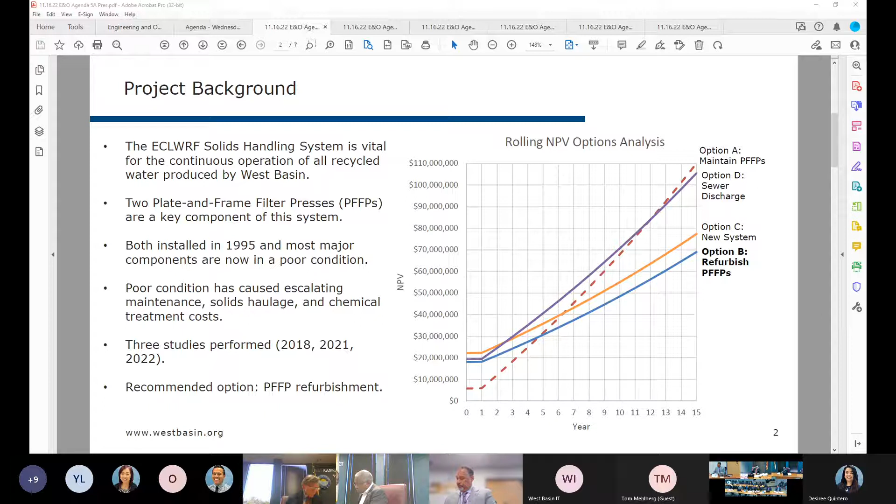Before we get to the action item before you today, I'd like to just take a moment to address some comments raised in the previous presentation. So 3 requests were made. The first was a request for further detail on the current actual costs of running the solids handling system. The second request was for additional background on how the costs were estimated for option A, maintenance of the PFFPs, also known as the do nothing option. And the third request was for further information on how our maintenance contract functions.

Regarding this first request, this slide here shows a chart of the actual costs of operating the solids handling system since 2013. The table to the right details costs over the last 3 financial years, rounded to the nearest $100,000. As you can see, we have experienced steep climbs in nearly all cost categories across the last few years. And as stated in my prior presentation, this is mainly due to the poor condition of the system, leading to increased maintenance, operator presence, and haulage.

Over the last couple of years, the solids handling system has cost approximately $5 million to operate and maintain. And as stated in the previous presentation, our calculations show that refurbishment of the plate and frame filter presses can significantly reduce this to around $2.8 million per year, generating a break-even period of approximately 7 years, despite the $15.3 million capital investment required for the refurbishment. Next slide, please.

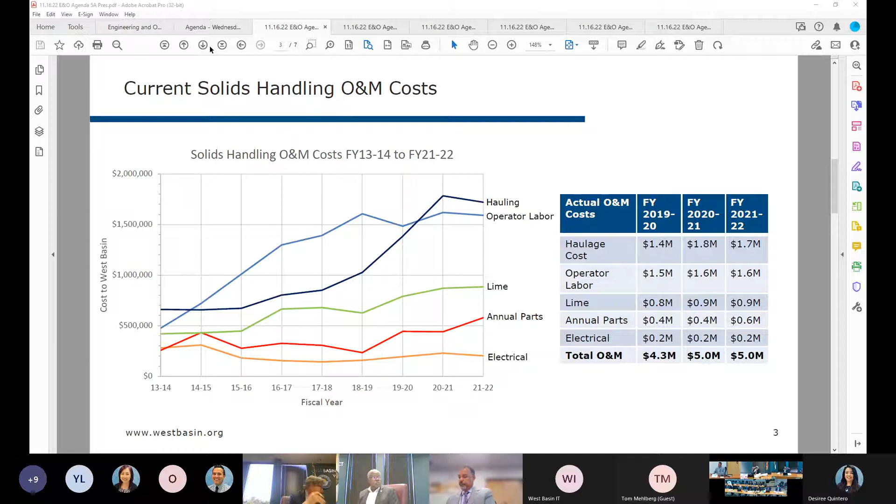The second request from the last E&O was for a more detailed breakdown of these do-nothing cost estimations, the option A cost estimations. So here I've taken the same table from the previous slide and added in a column with the cost estimations used on that option. As you can see in the table, the estimated costs closely track the costs from previous years, with 3 notable exceptions: operator labour, annual parts, and quantified risks.

Operator labour was estimated to be slightly lower than actual cost from previous years. This is due to the fact that the actual costs shown here in the last 3 fiscal years include a small amount of labour on other elements of the solids handling system, so the gravity belt thickeners and sludge conditioning tanks. As for the purposes of this, we're only discussing the plate and frame filter presses. The estimated labour cost was estimated to be slightly lower.

The second and third deviations, so that's the annual parts and quantified risks, are linked. If you remember from the previous presentation, quantified risks include estimated costs for replacing components, plates, and associated downtime. Therefore, the annual parts estimate needs to be reduced as some of these costs are covered in the quantified risk category.

Overall, we estimated the annual O&M cost of the do-nothing period to be $5.8 million moving forwards. As you can see, this is a close approximation to the actual cost last year of $5 million. The slight difference here can be explained with the quantification of risks, such as component failure and downtimes that we expect to occur more frequently as we continue to operate a system that is in a poor condition.

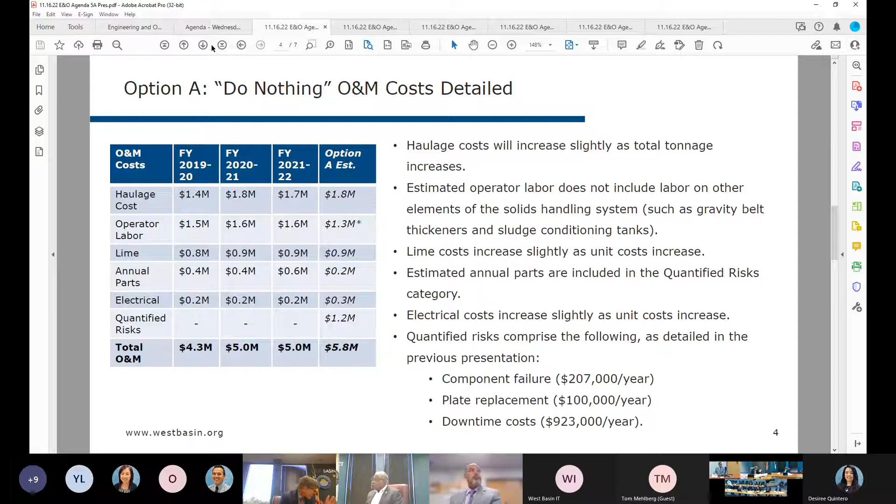I was going to pause here for any questions, but I know we've got a full agenda, so if it's okay, I'll continue on for the rest of the presentation. Take questions at the end. For right now, go ahead, unless Director Williams. Okay, excellent. So next slide, please.

So moving on to the action item. This slide depicts the overall project schedule. Last month we presented the project review, and today we're bringing the filter cloth procurement award forward for you. So the project review is in the top left there, and the filter cloth procurement award is in the red box. This is the first board action on this project, and it consists of the procurement of replacement filter cloths for the PFFPs. The actual procurement cost is $68,180. However, we have included a 10% shipping contingency of $6,818 to ensure we can manage any potential shipping cost changes.

If this procurement is approved, the next item before the board will be the procurement of a contractor to install these cloths. Staff aims to bring this contract award for this work before the board in January of next year. That award is estimated to be approximately $75,000. Next slide, please.

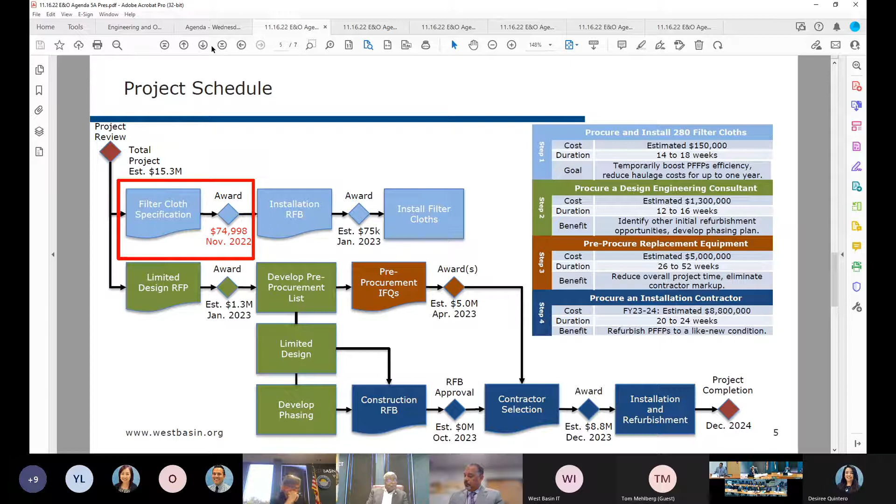So on to the business case as to why staff recommends actually replacing these filter cloths. In the last financial year, we spent $1,719,826 on hauling away these solids cakes produced by our PFFPs, our plate and frame filter presses. Now, this was on the previous contract where we were paying $66 per tonne. We're now moving on to a new contract that will be $87 per tonne. This contract was approved by the board back in May of this year.

In July of this year, as part of the planning for the solids handling improvements projects, we conducted an inspection of the plate and frame filter presses alongside a representative of the original equipment manufacturer, so the manufacturer who made the presses back in 1995. As part of this inspection, the representative identified that not only were 2/3 of the filter cloths fitted to the presses in a poor condition, but that we were utilising filter cloths of inferior quality.

According to this representative, such inferior quality cloths have flooded the US market in recent years, and many previously reputable vendors were switching to these cheaper cloths despite promising higher quality versions. This information about poor business practices within the industry was later corroborated by another public agency that has the same filter cloth requirements as West Basin.

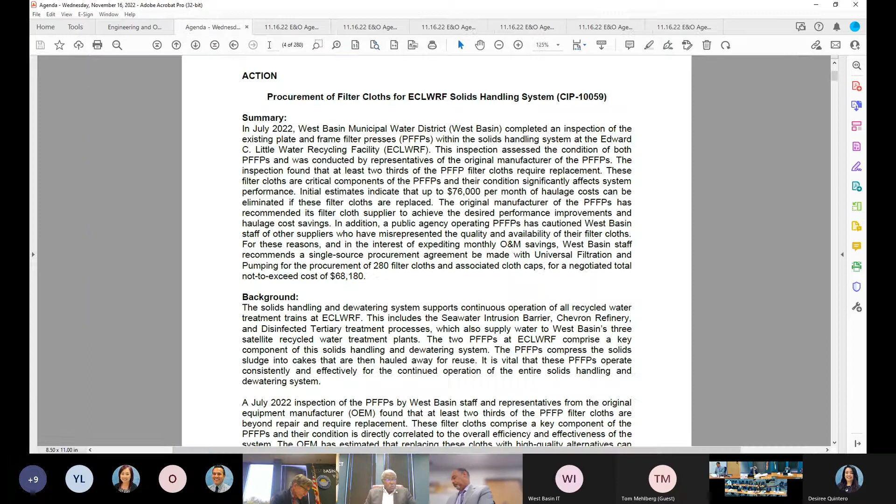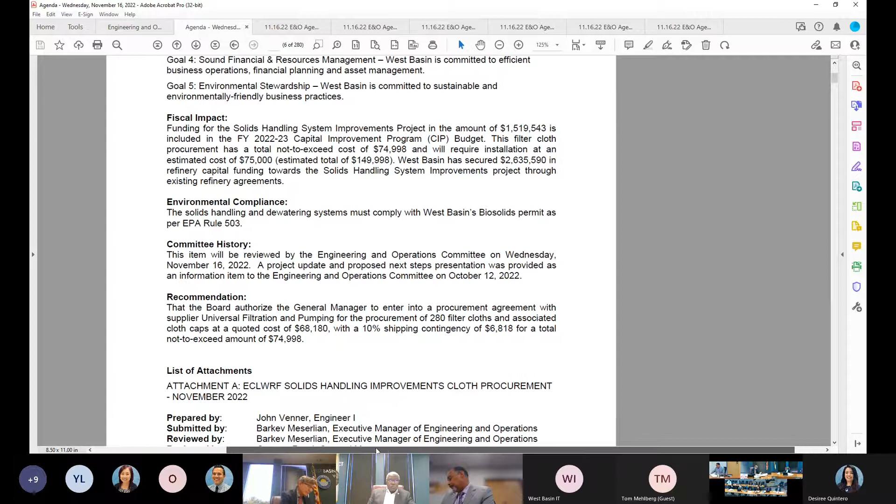So with that, I'll ask you to return to page 6 of your board packet for the recommendation: that the board authorize the general manager to enter into a procurement agreement with supplier Universal Filtration and Pumping for the procurement of 280 filter cloths and associated cloth caps at a quoted cost of $68,180 with a 10% shipping contingency of $6,818 for a total not to exceed amount of $74,998. And with that, I welcome any questions.

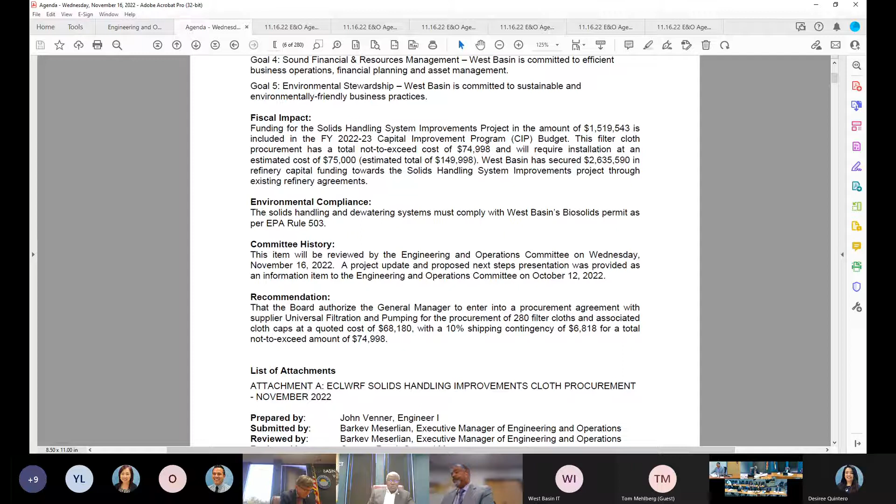All right, John, thank you very much. Director Williams, do you have any questions? I have no questions other than to the general manager. Is this a good deal for us? I think it's a very good deal. The cost savings that's demonstrated by the analysis, the efficiency of producing a drier solids cake from our solids handling process will help us realize that savings. It's a first step out of many steps.

And what John didn't talk about is having a better solids handling process will help the overall handling of solids throughout our recycled water production process and improve water quality. It'll be one of the contributors towards improved water quality for our Title 22 process. Okay, thank you.

Okay, I do have a couple of questions. Back to your cost/savings analysis. Basically, on this particular item, by replacing the filters, we're obviously going to reduce the amount of hauling that needs to be done. So the estimate is about $900,000. Is that consistent if you project this over the next 5 years? And the follow-up question to that is, what is the life of the next replacement cycle for these filters?

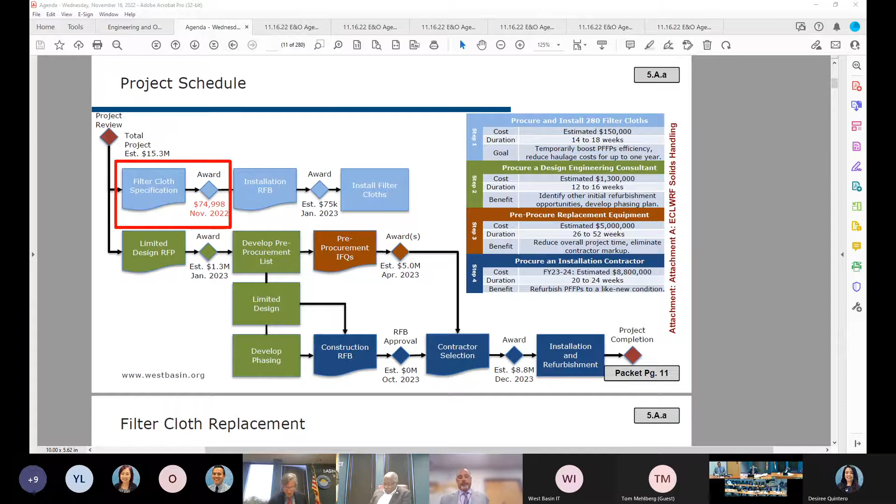We have the agreement amendments for supply and delivery of carbon dioxide and sulfuric acid. And general manager, if you want to handle that one? Yes, and so we have Susanna Lee here, our senior operations engineer. And if it would please the committee, we can have her speak to both item B and item C, both dealing with chemical contracts, so we could flow right from one to the other. Is that okay? Yeah. Okay, fantastic. So Susanna, please. Thank you, Greg, and good afternoon, Chairman Alvarez and William.

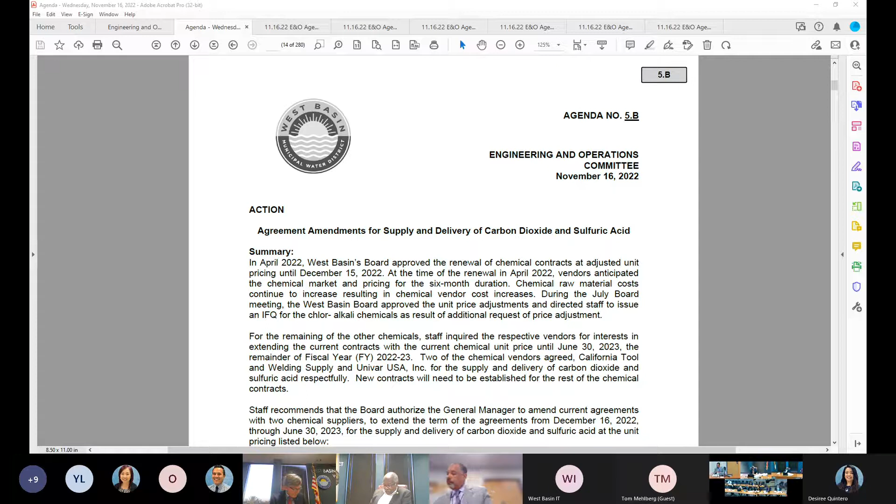So as Greg mentioned, we have two agenda items, items 5B and C, related to chemical contracts. As we are all aware, the chemical industry has been facing a lot of struggles with supply chain issues, and with the latest, the railroad strike that will potentially go on in early December. And so what I'm here to present in these two items is to establish contracts for the remaining bulk chemicals for the rest of the fiscal year 22-23.

The last time staff came to present to the board in regard to chemical contracts was in September for the chlor-alkali chemicals contracts, in which the board directed staff to establish new contracts as we were continuously facing requests from vendors for price adjustment. And so those three contracts will end March 31st, 2023. So before the end of the fiscal year, I will be coming back to request either an extension for those three bids or going out for bids for those three chemicals again.

So for the remaining 8 bulk chemicals that we had renewed back in April, the contracts are ending December 15, which is coming up in a month. So those chemicals need new contracts. And before staff actually went out to advertise new IFQs for those chemical contracts, staff extended invitations to chemical vendors on whether they have interest in extending the contracts with the current unit pricing until the end of fiscal year 2022-23.

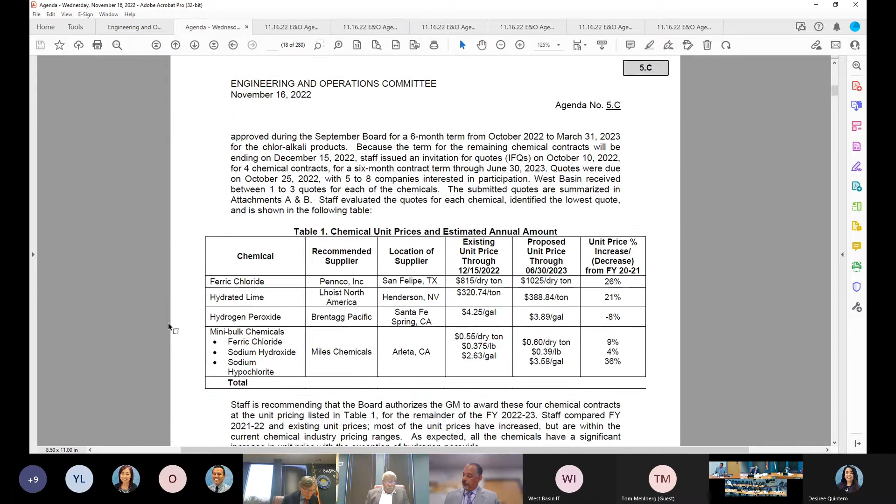So staff evaluated the quotes for each of those chemicals and identified the lowest quotes as shown in table 1 of the memo. So as shown in the table, and as expected, there is a significant increase in unit prices for those chemicals ranging from 4 to 36%. The 36% increase being sodium hypochlorite is one of the chlor-alkali, but that's for the mini bulk contracts.

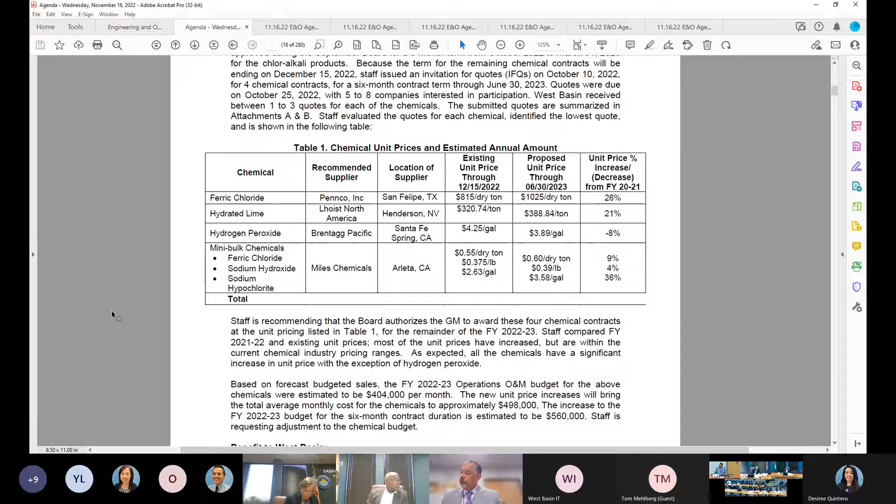There is one exception with hydrogen peroxide having a reduction in unit price. And the explanation is that Brenntag is actually the manufacturer for that chemical. The current contract that we have for that chemical is Miles Chemical. They actually purchase the chemical from Brenntag currently. Miles Chemical actually notified staff that they will not be able to hold the pricing for 6 months, but only for 3 months. So hydrogen peroxide is the only chemical that has a reduction, 8% reduction in unit pricing compared to the current contracts.

So based on the forecast budgeted sales for fiscal year 22-23, the O&M budget for these chemicals, we estimated about $404,000 per month. And with the new unit price increase, this will bring the total average monthly cost for these four chemicals to approximately $498,000 per month. And the increase for fiscal year 22-23 for the 6-month contract is estimated about $560,000, based on the current budgeted sales. So with that, I will be reading the recommendation for both memos at this point, and I'll take questions afterwards.

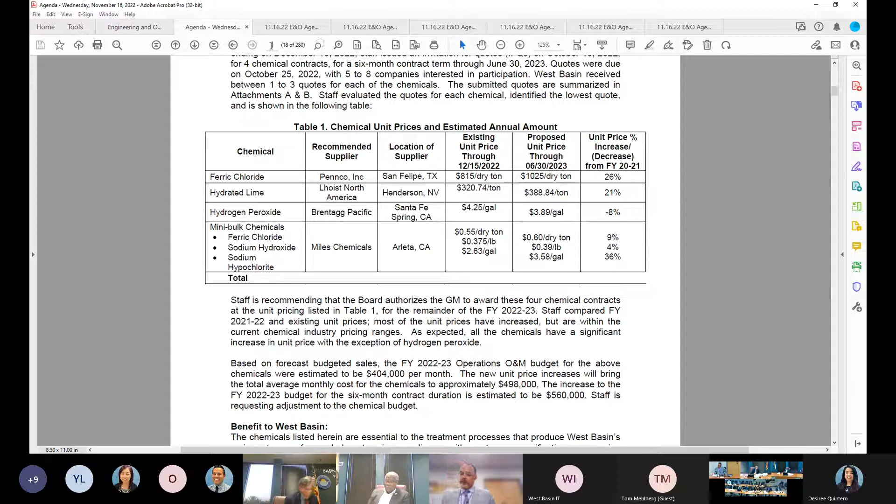So for item 5B, the recommendation is that the board authorize the general manager to amend current agreements with 2 chemical suppliers to extend the term of the agreements from December 16, 2022 through June 30th, 2023 for the supply and delivery of carbon dioxide and sulfuric acid at the unit pricing listed below. Carbon dioxide, California Tool and Welding Supply to supply and deliver carbon dioxide at 0.085 per pound, plus 0.0475 per pound of surcharge fee. For sulfuric acid, Univar USA Inc. to supply and deliver sulfuric acid at $365 per ton for ECL, $450 per ton for Torrance and $365 per ton for JMM.

And the recommendation for item 5C, that the board authorize the general manager to award agreements with the following chemical suppliers for the second 6 months of fiscal year 2022-23 from December 16, 2022 through June 30th, 2023 for the supply and delivery of the following chemicals. Ferric chloride, Pennco Inc. to supply and deliver ferric chloride at $1,025 per dry ton. Hydrated lime, Lhoist North America to supply and deliver hydrated lime at $388.84 per ton. Hydrogen peroxide, Brenntag Pacific Inc. to supply and deliver hydrogen peroxide at $3.89 per gallon.

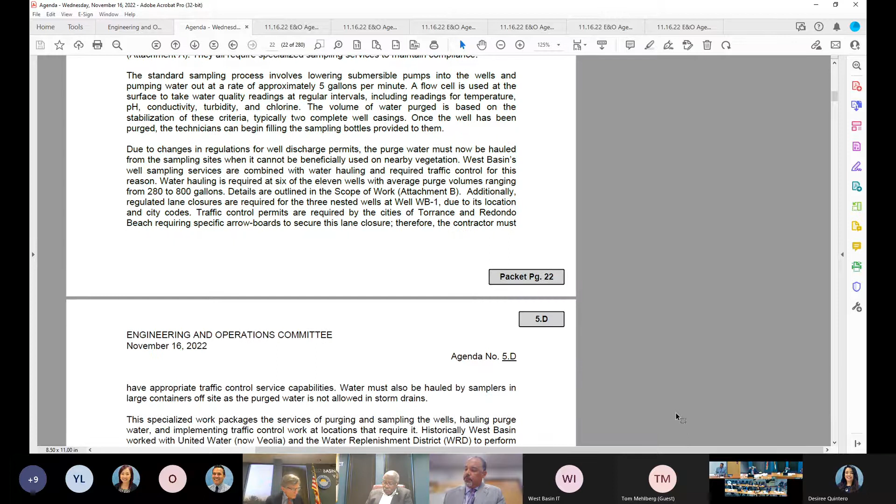Because there have been changes to the regulations for well discharges, West Basin now has to either haul away the purge water or use it on nearby vegetation. And the final component of this bundled project is traffic control. The triple nested well, which is the only one that's actually owned by West Basin, is on a busy street that requires a lane closure and the associated permits, equipment, and city notifications. Since the city's well discharge permit was amended in 2018, West Basin worked to find full-service sampling firms who could haul away the purge water and comply with the strict traffic control requirements.

3 people evaluated these proposals, including an outside evaluator from LA County Department of Public Works, who is our partner in the barrier project and owner of 8 of the 11 monitoring wells. A summary of the evaluation scores is provided in attachment C. A cost summary and copies of both of the companies' pricing is provided in attachment D. Both of the companies are capable of performing the full scope of work.

After evaluating the 2 proposals for the project and considering the recent staffing and trucking shortages, staff is recommending to split the contract in order to maintain flexibility with the sampling requirements. The overall score for the WPI proposal reflects careful attention to detail and a deep understanding of the full scope of the project. Blaine's score also reflects competence and allows for issuance to sample for 3 of the monitoring wells.

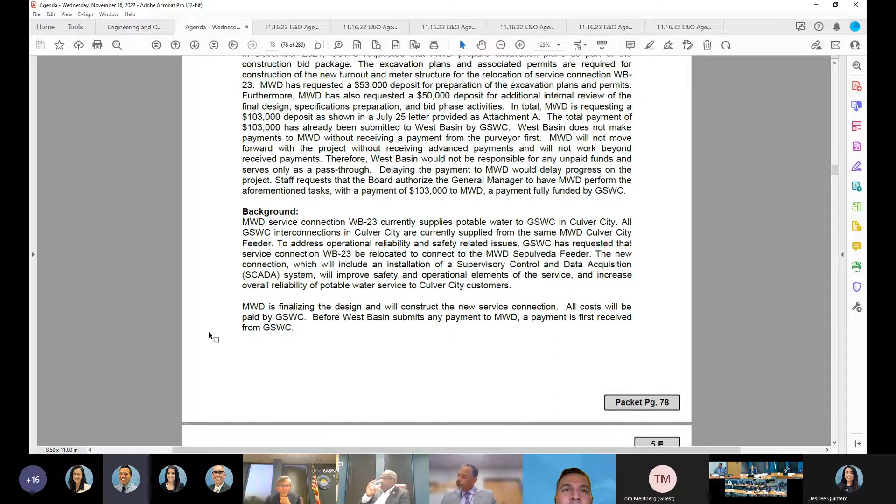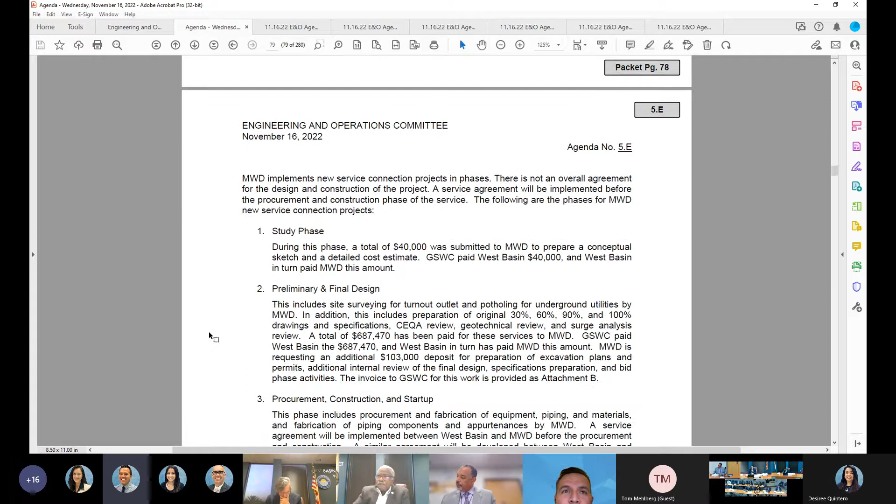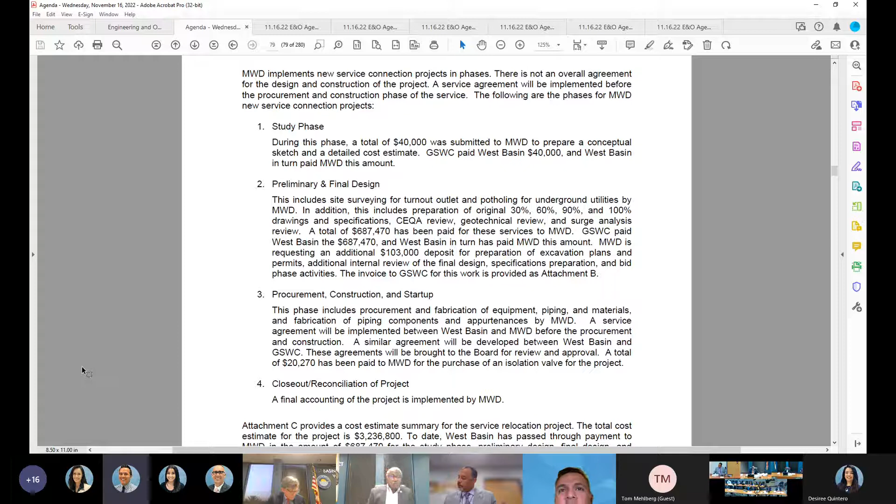MWD is currently in the final design phase of the project itself. Recently, in December of 2021, Golden State requested that MWD prepare excavation plans as part of the construction bid package. Additionally, MWD has requested a deposit for additional internal review of the final design, specifications preparation, and bid phase activities. As a result, MWD is requesting an additional $103,000 deposit for these tasks. West Basin has received the funds for this additional deposit from Golden State, and therefore is ready to issue payment

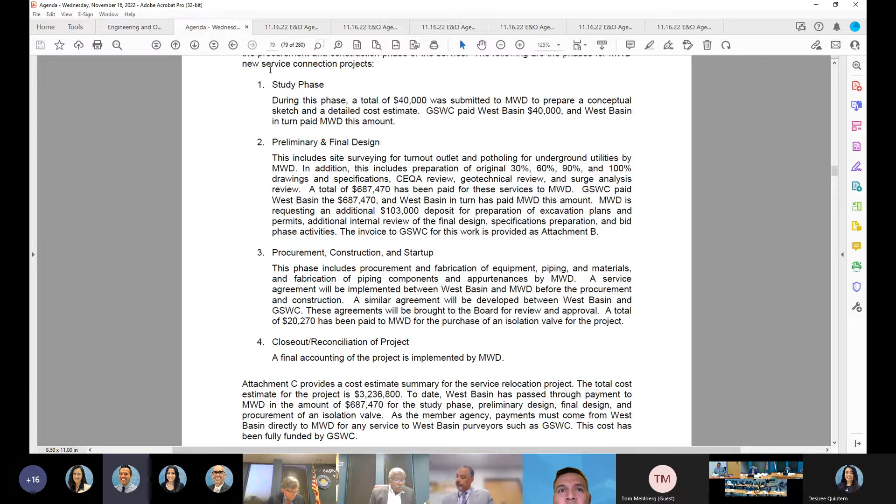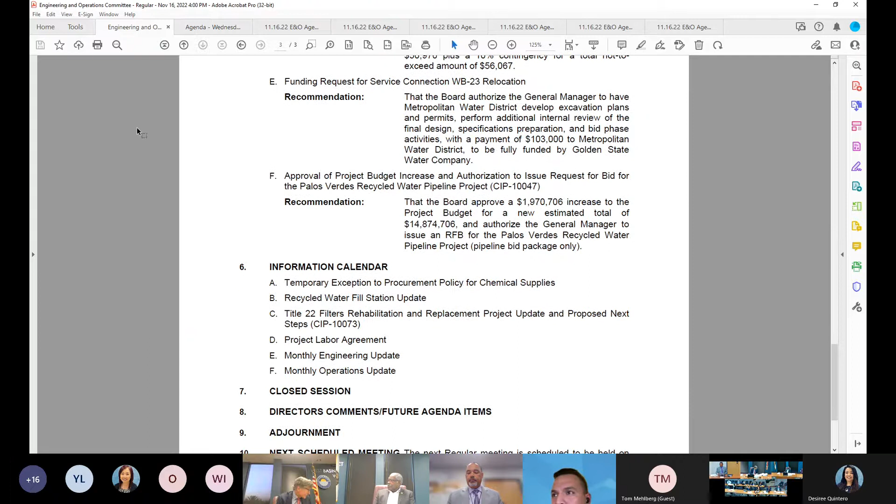to MWD. So at this time, I would like to read the recommendation that the board authorize the general manager to have Metropolitan Water District develop excavation plans and permits, perform additional internal review of the final design, specifications preparation, and bid phase activities with a payment of $103,000 to Metropolitan Water District to be fully funded by Golden State Water Company. And with that, I'll be happy to answer any questions. Director Williams, do you have any questions? No, thank you. I don't have any questions either. We'll move this item forward. I concur. Thank you.

All right, next item is the approval of the project budget increase and authorization to issue requests for bids for the Palos Verdes Recycled Water Pipeline project. Okay, and so we have our engineering supervisor, Veronica Javia, who's here to provide the report and staff recommendations. And I think we have an item that I'll cover to start the conversation, correct? And so where are we in terms of the package page? Page 86. The presentation is on page 92.

92. Okay, thank you. All right, so I want to just start off. We had a really fantastic presentation of the PV lateral project, I think it was a couple E&O committees ago. And we had the pleasure of our public relations consultant, Trisha Morikawa, with us. And we talked about the totality of the project, where we are, where we're headed. And in that presentation, we talked about the next steps of advertising the project and concluded our presentation. And so with that, the committee had asked that we bring back to the board when we're ready to advertise, to seek approval to actually advertise the project. And so that's where we are today.

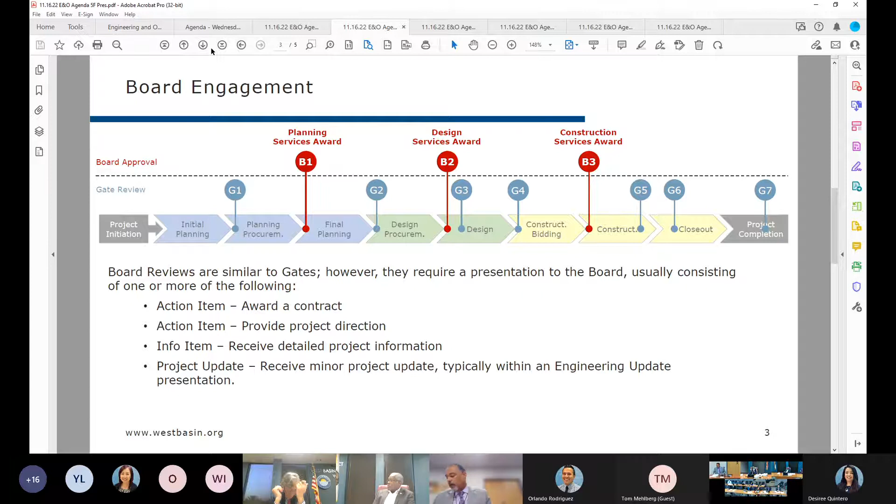And then finally, once we get into the construction phase, we would bring the bid package back once we have the bids in to get an award from the board. And so what this committee has asked is to add a new touch point, which is the next slide, to authorize the project before it goes out to bid for construction.

So with that being said, I just want to make sure that we understand all the opportunities for the board to have a hands-on approach. We're adding a new one as requested by this committee. And so that's what we will do for public works construction projects going forward. We're going to bring those to you for review before we advertise. I want to make sure that the full board is aware of that.

We don't have your fellow board members here today. But the reason why I'm bringing this forward is to make sure that the full board is understanding of the process change that we're making. So with that said, I want to hand it off to Veronica to continue on with our discussion. Question? Yes, but this will go to the full board for approval. That's what you asked for. That's why we're here today.

Okay. Quick question. I know you probably have told us before, but there's so much that goes across these areas here that I have a tendency to lose some of it. So who or how will this project, the program management of the project, you know what I mean? So who's the project manager? Yeah. Is that the question? Of the program, of the entire project. It's a project, but it has other elements. So who is the manager of the total project?

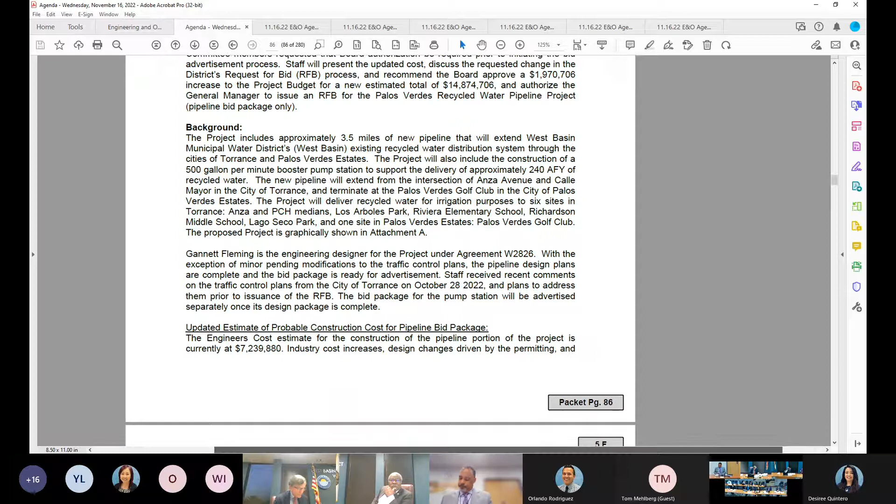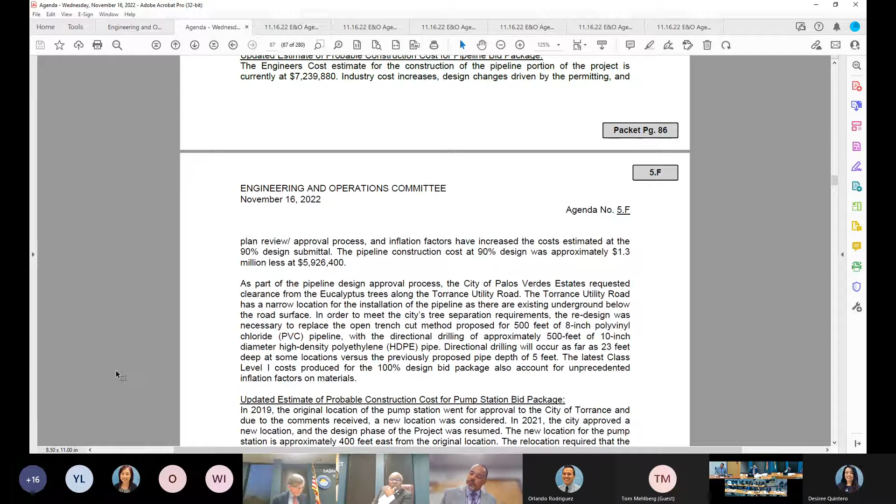$7,239,880, which is a little bit higher than the original estimate of $5,926,400. And some of these costs are due to the industry cost increases, as well as some design changes that we had to go through with the permitting, and the inflation factors that we have been experiencing over the last year have been greater.

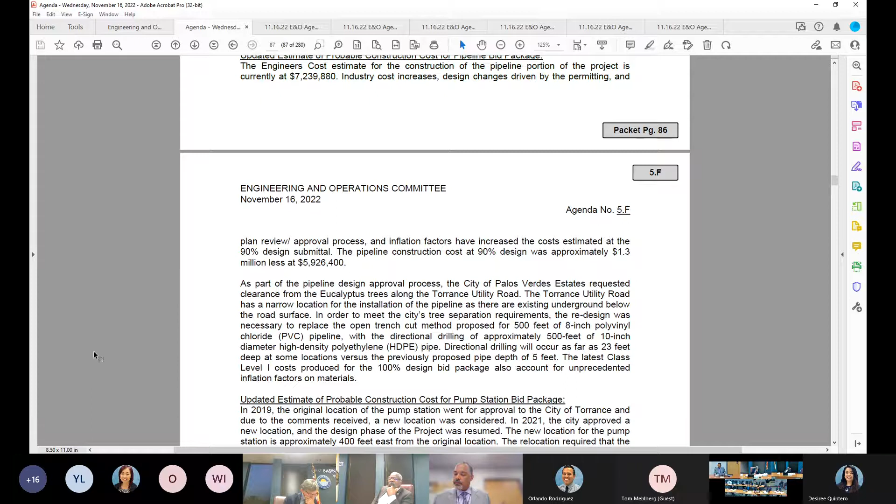Just to mention some of the changes that we had to go through was the directional drilling that we have to do to avoid eucalyptus trees on the Torrance Utility Road. So initially we were going to be building a pipeline in an open cut trench, which is 4 to 5 feet deep. And having to do directional drilling requires a different type of material as well as sizes.

We were going to be using 8-inch PVC pipe. Now we're using 10-inch HDPE pipe, because it has to be a bigger material. And it's also 10 inches for the same reason, for the thickness of that material. So that brings another component or element to that type of construction, as well as other items like, for

example, the pump station. The original location of the pump station was located in a public area. The cover was just dirt and mulch. And with us moving to a parking location, now we have to bring the additional pipeline, the intake pipe, which is a 10-inch line, and an 8-inch discharge line, one to the pump station and one out of the pump station, for an additional distance of 400 feet each.

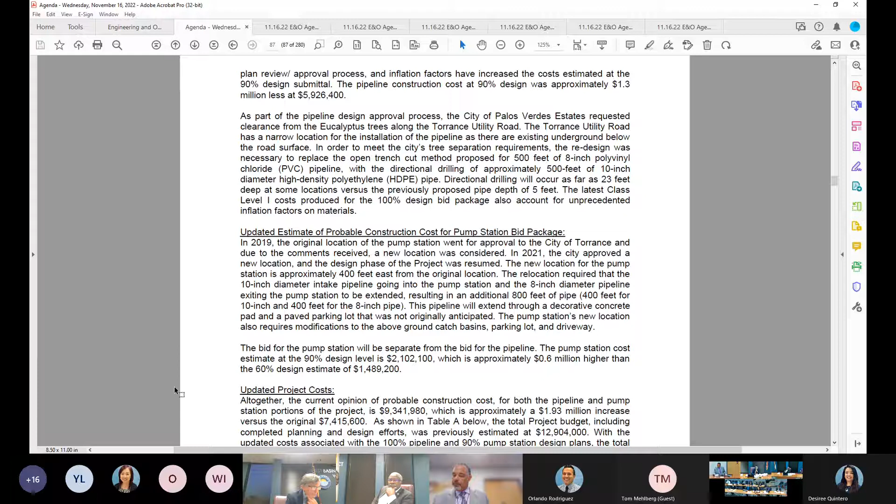And now instead of just going through dirt, we have to go through parking and reconstruct some decorative rocks and all that other additional work, as well as reconstruct a parking lot that originally was not part of the plans. There are also, at that particular location of the pump station, other items like catch basins that right now are above ground.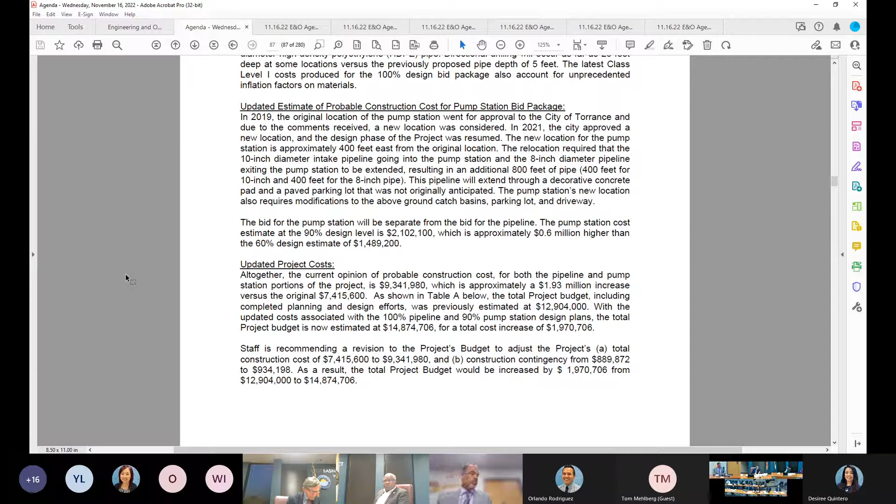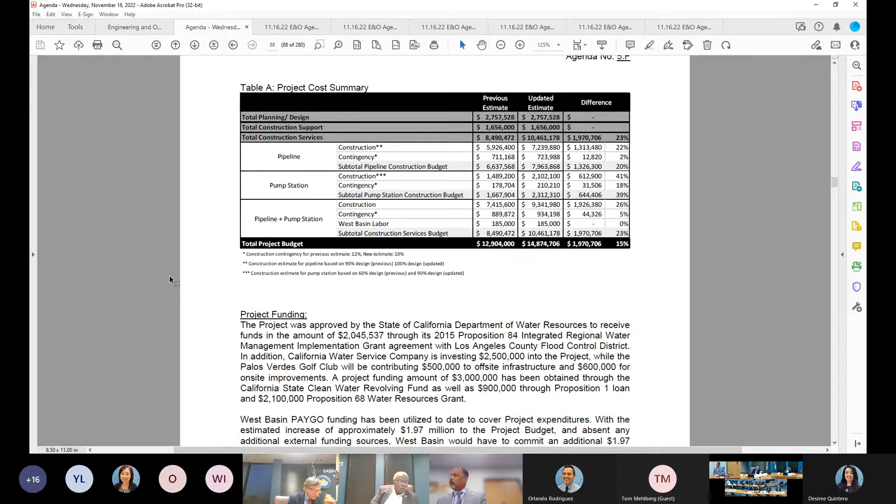And in order to build a facility there, we need to bring all those facilities below ground. So essentially, that's been a lot of the permitting that we've been working on with all the agencies, City of Torrance, Palos Verdes, LA County, to make sure that the design is meeting all the requirements that they need. So with this, on Table A that you can see in your package, page 88, there's a table that shows what was the original previous estimate and what is the updated one now.

So we have basically updated the pipeline, the pump station, as well as the corresponding contingency on those columns, and have included also a column to show the difference. And basically the differential is $1,970,706. And basically we have been looking into how these funds are going to be funded.

So our proposal is basically that with this additional increase of that 1.97 million, and not using any additional external funding sources, we will commit that additional money from the reserve funding for the project to secure sufficient funds for the project's implementation.

So on table B, you can also see basically the current fundings that we have. And also you can see the updated information from previous to current, basically showing what is our additional funding proportion to West Basin. Sorry. So with this, I can read the recommendation and I can take any questions.

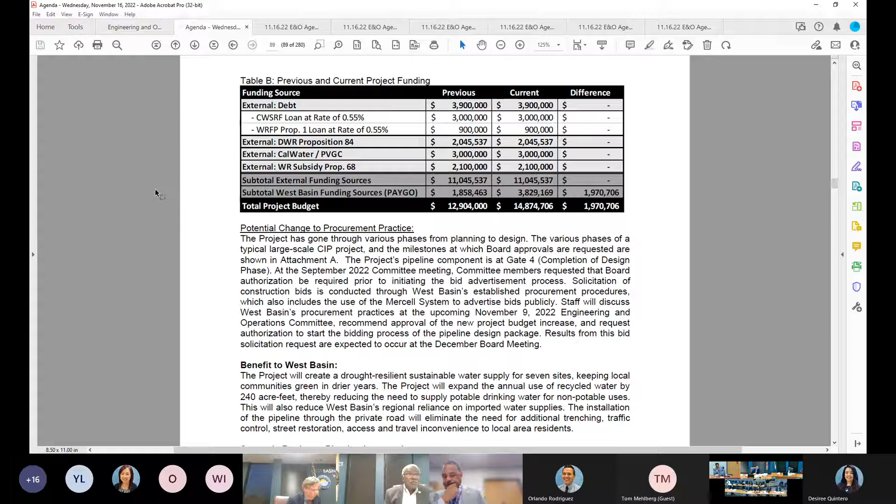So the recommendation is that the board approve an additional $1,970,706 increase to the project budget for a new estimated total of $14,874,706, and authorize the general manager to issue a request for bid for the Palos Verdes Recycled Water Pipeline project only. Again, this is the authorization for the pipeline only. The pump station is still under review for permitting, so that will come up later on. And with this, I will take any questions.

And if I may, I'd like to clarify my earlier remarks. Yes, absolutely. So going back to the request for bid, we're bringing this forward. We'll continue to do that as a practice going forward, but I would reserve the discretion for smaller scale projects, urgent projects, to go straight to bid so that we could bring those to the board in a faster fashion where I deem that to be necessary and in the district's best interest. Depending on the size of the project and the urgency required, be appropriate.

Thank you. Question concerning the parking lot. I heard you say that you have to now cut across the... Some cities don't like to see cuts in their asphalt parking lots. They require you to pave a heck of a lot more asphalt. Are we seeing that here?

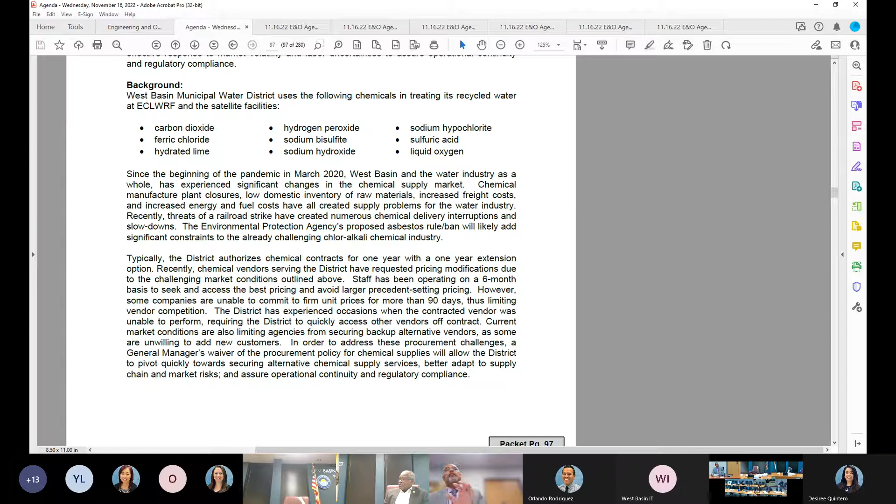And so what we want to do going forward under this authority is to provide more rapid engagement with the vendors. So it might be shorter duration contracts. I call them spot purchases. So we might do a spot purchase for a 3-month period, maybe a 2-month period, whatever we can get on the market to secure a reliable service for the best price possible. And also to give us the flexibility of responding if a vendor should not perform.

We actually had that situation, I think, 2 months ago, where one of our chemical vendors was not able to supply us, and we had to find a different vendor immediately to provide that chemical. So it was a critical purchase, and I authorized that critical purchase. Was it for a limited period, 1-week period, something of that nature? 2 deliveries. Was it 2 deliveries for sulfuric acid? Thank you for the clarification. So it's a very volatile market, and exercising my authority in this manner will help us be quicker in responding to the volatility and give us a more effective tool to be responsive. Sounds good to me. Okay, fantastic.

All right, so that takes us to our next information item, our recycled water fill station update. And we have Camille Castillo, our project manager, who's ready to provide the report on how we're doing with our development of the water recycling fill station. Item B. This is item 6B. Yes, thank you, Greg.

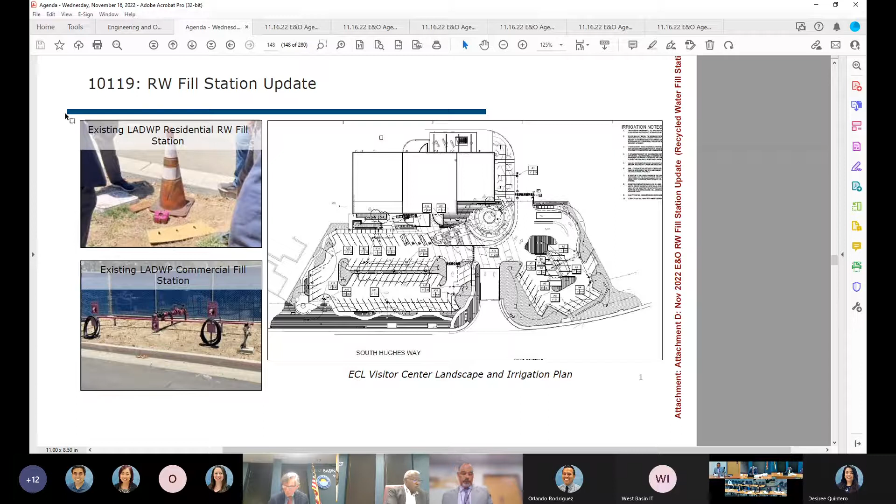So if you go to the next page, 149, you'll see in the last month, we were able to perform a flow rate test to verify the irrigation system. So on the east side parking lot, you'll see that there is schedule 40 PVC piping throughout the parking lot, and they range between 3/4 inch to 2 inches. And we were able to go out one day in October to test the flow rate at this specific 1-inch quick coupler. And from this flow rate test, we were able to determine an average of 14.94 gallons per minute flow rate. So it is a feasible thing.

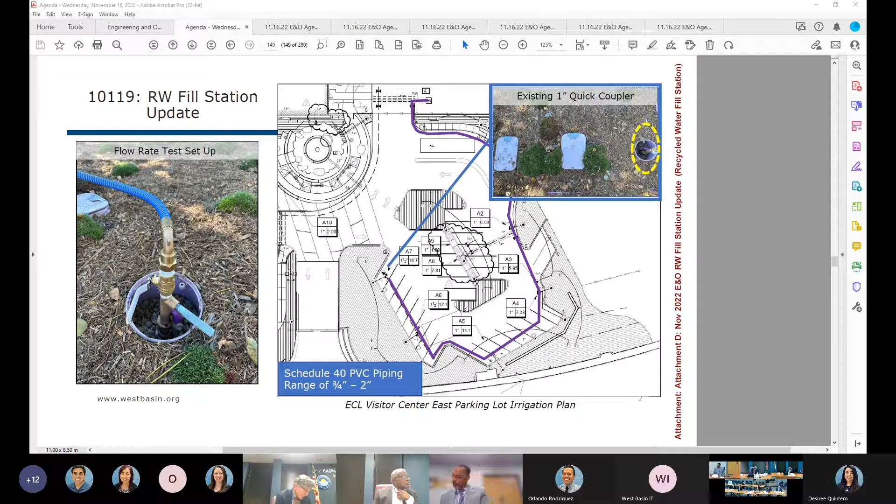And then the next slide, you will see an update on our schedule. So this month as well, we've been focused on the procurement. So for the permitting portion of this recycled water fill station, we were able to release a task order request to our 6 on-call engineering consultants on October 24th. And then we did get proposals back on November 3rd, and that deadline was extended per a consultant request, which we were able to internally discuss and grant. And so we received 3 proposals for the permitting, we evaluated them, and we decided to select Hazen and Sawyer. We are currently in the process of getting the contract signed and procured, and the actual authorization date will be later once we obtain all the signatures.

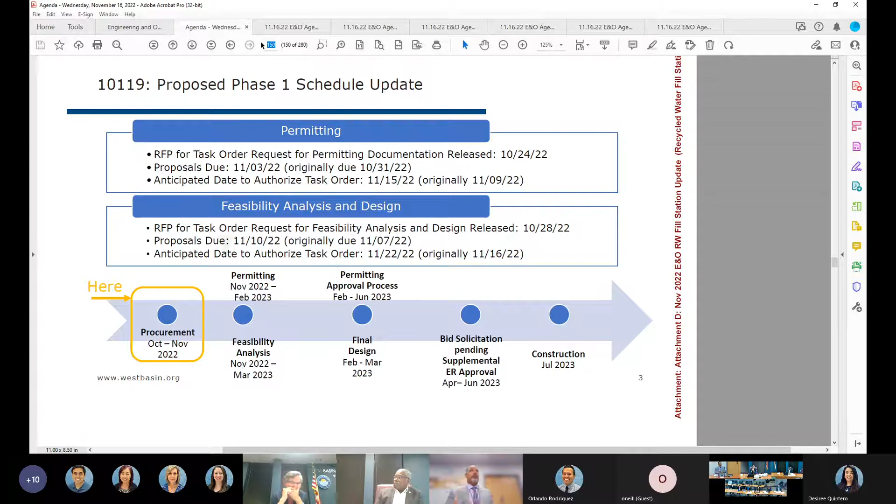And for the feasibility analysis and design, we also released a task order request on October 28th. And again, we were asked by a consultant to extend that deadline. So we extended it to November 10th, and we received 4 on-call proposals. We are in the process of evaluating those proposals right now. Once we are able to select and get those contracts processed, we will be able to authorize that task order. So that currently is our update, and we will provide you more once we are able to move forward. And I'll add that I appreciate the weekly updates that Camille has been preparing, and I've been sending those to the committee. Hopefully you find those to be useful and informative as well.

Okay, do you have any questions on this, Director Williams? I have a couple of comments, I guess. By the way, how much are we gonna pay for the engineering study? Sorry, what was? What's the ballpark? You got a proposal? So yeah, for the permitting, we granted 97,000. 97,000 for the permitting portion of the project. We're gonna pay $97,000 for this report? Yes, so it is a supplemental engineering report as well as updating the Title 22 engineering report. And I think that probably deserves a little bit more discussion, because it is two very distinct scopes of work in that one authorization.

Yeah, and so that update really goes to the topic of, we have a Title 22 report that simply just needs to be updated. And that's something that our Department of Drinking Water, DDW, and the Regional Water Quality Control Board have expected of us for some time. And so this is an opportunity for us to tackle that task while also pursuing the amendment that the committee has asked for in terms of this project.

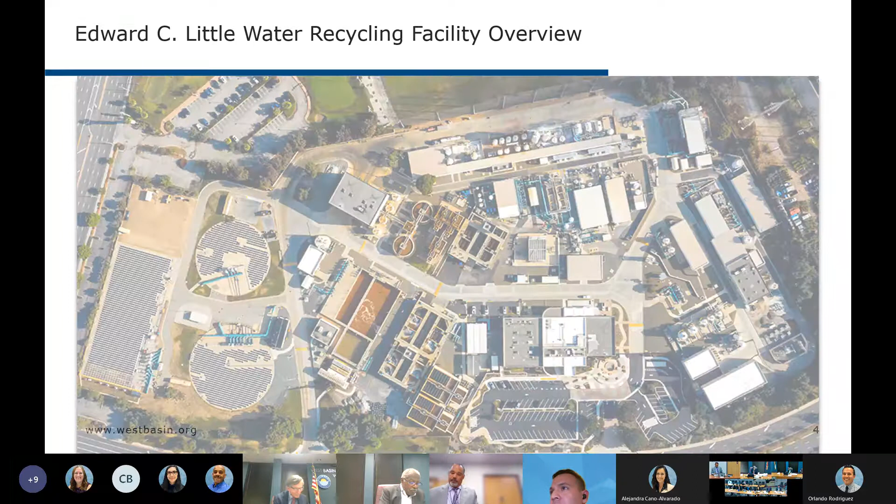So here is an aerial of the Edward C. Little Water Recycling Facility. Now, the secondary effluent from Hyperion enters ECL from the northeast of the facility via the Hyperion pump station and force main. From there, it enters the pretreatment high rate clarifiers, followed by the Title 22 filters. Now, filters 1 through 10 are adjacent to the high rate clarifiers here, while the converted filters...

If I could draw your attention to the screen, he has animation that's going on. So if you're not seeing... Oh, those. Sorry. Not sure if you're looking at that in your page or on the screen, but Orlando is showing some animation here. So please continue. Apologies. And then the converted filters 11 through 14 are north of filters 1 through 10.

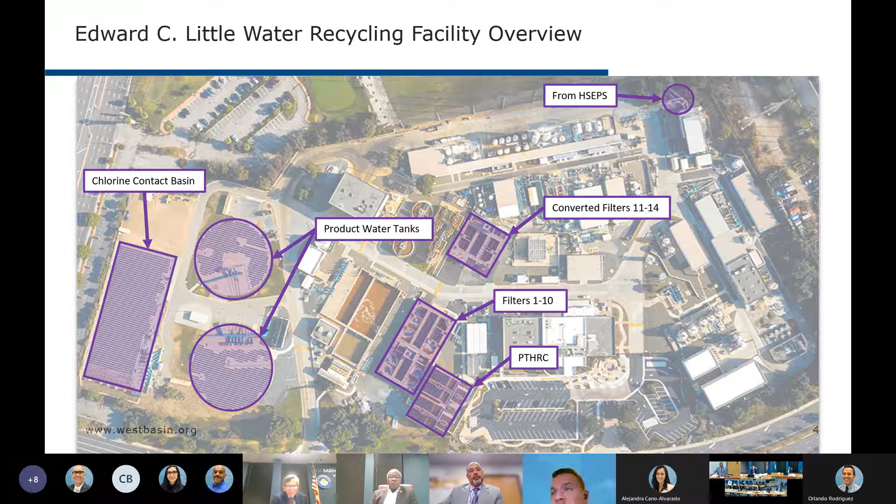Effluent from the filters enters the chlorine contact basins, which are downstream, followed by the product water storage tanks, where it then gets pumped into the distribution system, which is used for irrigation purposes, and is also the source water for each of the 3 satellite plants. Now, please turn to page 162 of the agenda packet.

So here's a brief background on the filters. In 1995, as part of the initial phase 1 construction of ECL, filters 1 through 6 were constructed for the production of disinfected tertiary water, also known as Title 22 water, along with filters 11 through 14, which at the time served as pretreatment for the production of advanced treated water for the West Coast barrier.

In 1997, as part of the phase 2 expansion, filters 7 through 10 were constructed and added to the existing filters 1 through 6 structure for additional disinfected tertiary treatment capacity. And in 2007, as part of the phase 4 ECL expansion, filters 11 through 14 were converted for even more treatment capacity for the production of disinfected tertiary water. Now please turn to page 163 of the agenda packet.

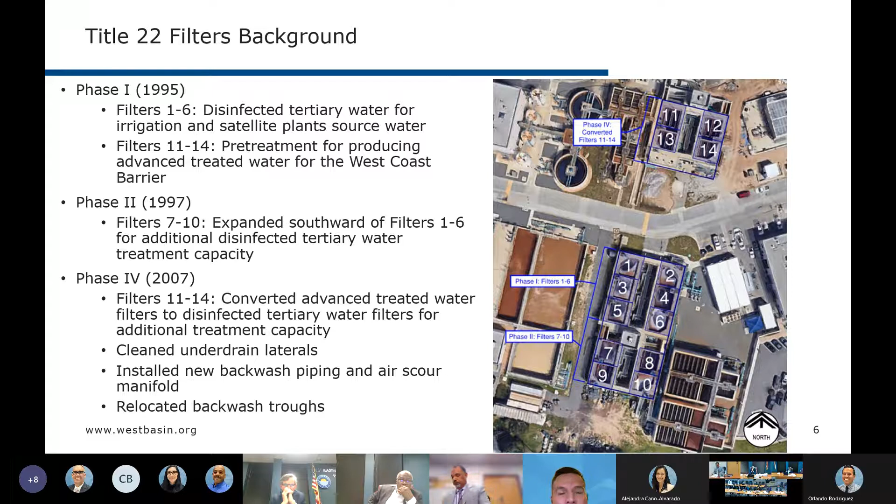So a key component of the filters are the underdrain laterals that help optimize performance while providing uniform distribution during backwash. These laterals typically have a useful life of 20 years. So based on the commission date as seen here, the filters have been operating beyond the end of useful life by 5 to 7 years. Now, please turn to page 164 of the agenda packet.

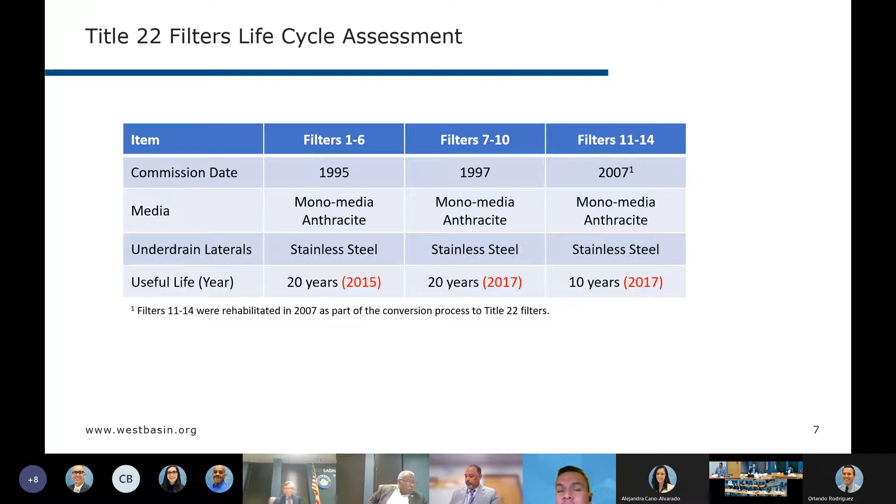Here I will go over a brief timeline of past failures and repairs that were performed on the filters. In 2013, filter 8 began experiencing media loss due to an underdrain failure. The filter was taken offline, media was removed, and rehab of the laterals was performed. And the filter was brought back online. In 2014, filter 2 experienced the same failure as filter 8. Therefore, the same repairs were performed to bring that filter back online.

After a few years, in 2017, filter 8 again, and now filter 9, began to experience media loss due to underdrain failures. Because of the repeated failure of filter number 8, it was decided to perform a more extensive R&R, and thus in 2018, the filter 8 and 9 project was undertaken. In 2019, filter 2 again began experiencing media loss and was thus taken offline. In 2020, the filter 2 repair project was undertaken to bring filter 2 back online. And more recently in 2021, filter 6 began to experience media loss and now is offline as well.

Two things that I want to note here is that in 2019, during a routine inspection, media was discovered inside the backwash Densadeg by our operators. The removal of the media was performed at a cost of about $11,860. Also in 2020, during the chlorine contact basin R&R project, media was discovered inside the chlorine contact basins, and therefore an unforeseen $93,000 change order was executed to remove that media. The reason I bring this up is that the Title 22 process is an interconnected one, and these failures can have impacts on other treatment components downstream as well.

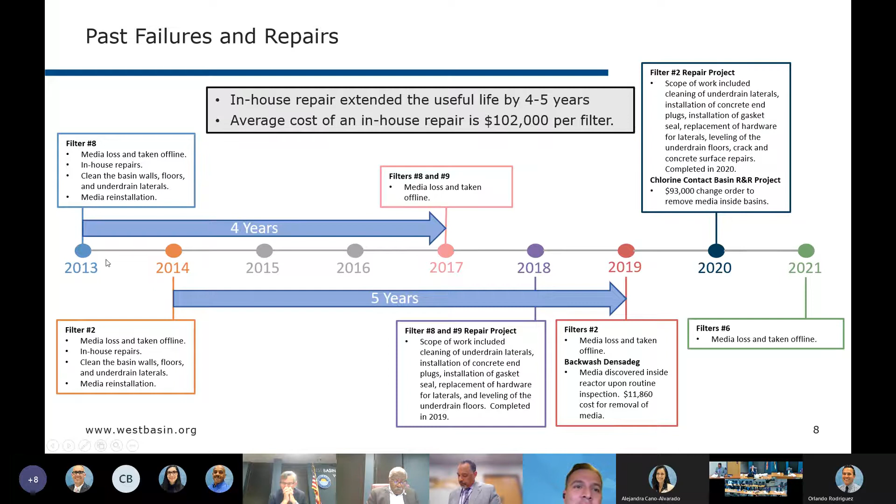So due to the repeated failures of filters 2 and 8, and at the time filter 9, it was decided to undertake a more comprehensive R&R project for the remaining 11 filters. So in 2020, an RFP for design services was initiated, and after a thorough evaluation process, the project was awarded to Carollo Engineers. Scope of services included an evaluation of R&R alternatives, a preparation of drawings and specifications, and a construction bid package.

During the design phase, 4 technical memorandums were completed, and a recommended scope of work was developed to replace the underdrain laterals, perform concrete repairs, and construct necessary safety improvements. The construction bid package was completed this past June. And now please turn to page 166 of the agenda packet.

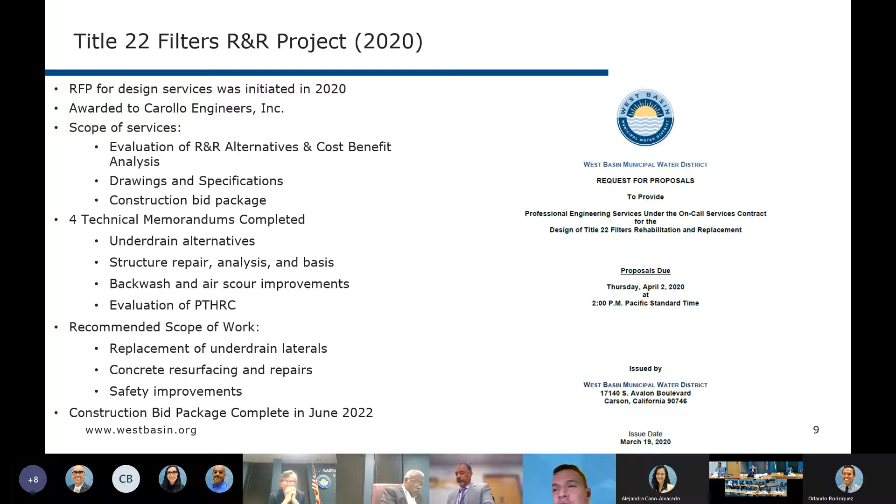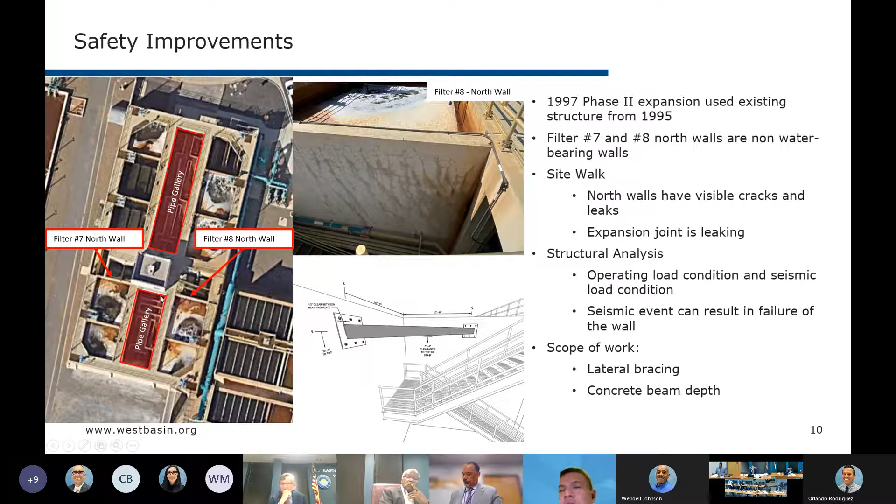So therefore, staff requested that the consultant perform a structural analysis, and the findings indicated that during a seismic event, this can result in the failure of the wall. And for these reasons, it is important to implement the recommended safety improvements in the form of some lateral bracing and added concrete beam depth that will increase the load capacity of the walls themselves. Now, please turn to page 167 of the agenda packet.

So overall, filters 1 through 10 have a design treatment capacity of 30 MGD, and filters 11 through 14 have a design treatment capacity of 10 MGD, sorry. I apologize, here in the slide there is a typo. Today, as you can see on the picture to the left, filters 6, 8, and 9 are currently offline, as well as filters 11 through 14.

In total, ECL currently has a firm treatment capacity of 18 MGD due to one filter always being in a backwash cycle. So with the recommended scope of work, by replacing the underdrain laterals, we can expect to limit the probability of any major future repairs by also extending the useful life of the filters by about 20 years. Now, please turn to page 168 of the agenda packet.

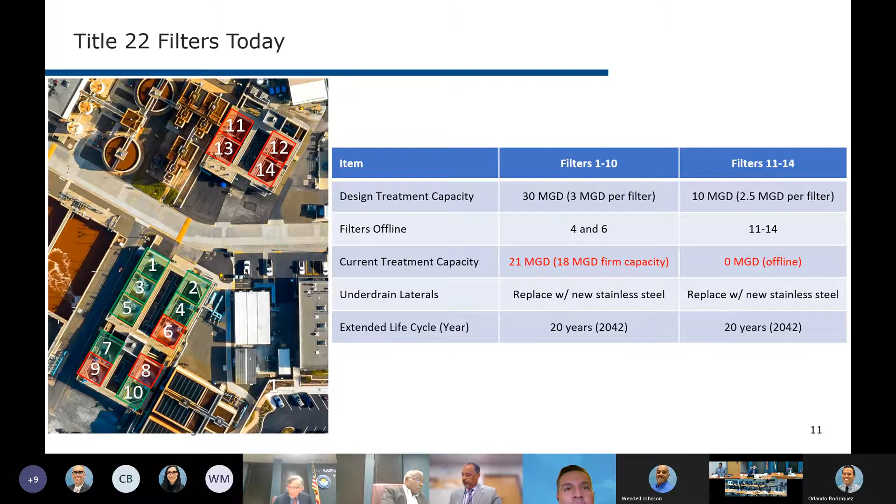So as part of the data gathering exercise, SCADA data was collected from 2018 and 2019, as 2020 and 2021 are considered somewhat of anomaly years due to the COVID-19 pandemic. So we feel like 2018 and 2019 are a better representation of true demands. So during this time, the highest daily average flow was approximately 25 MGD in 2018 and 23 MGD in 2019. Also, peak max day demand was 30 MGD in 2018 and 28 MGD in 2019.

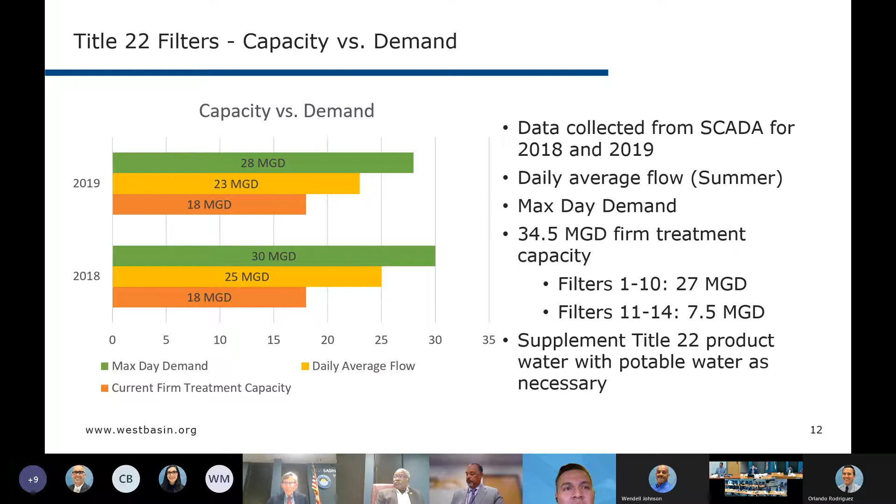So as you can see, in comparison to our current firm treatment capacity of 18 MGD, we are not able to meet these demands using Title 22 water as the source water. So in these cases, we then supplement the Title 22 source water with potable water at the satellite plants. Now please turn to page 170 of the agenda packet.

So as previously mentioned, Title 22 water is the source water for the satellite plants. Title 22 water enters the satellite plants and is refined further to produce either nitrified or boiler feed water. Typically, when the product water demand is greater than the Title 22 source water coming in, potable water is supplemented and used as makeup water to meet these demands. Unfortunately, this comes at a high cost to West Basin, as we have to pay the full retail potable water rate of the local purveyor.

So in this case, for the Chevron nitrification treatment plant, when we supplement with potable water, West Basin loses approximately $936 per acre foot in recycled water sales. So as shown for fiscal year 2021-2022, West Basin lost a total of $1,731,600 at CNTP due to the potable water supplement.

And also, to put things in environmental perspective, the potable water supplement used here is the equivalent of 5,550 typical households' usage per year, considered to be a family of 4. Now, please turn to page 171 of the agenda packet.

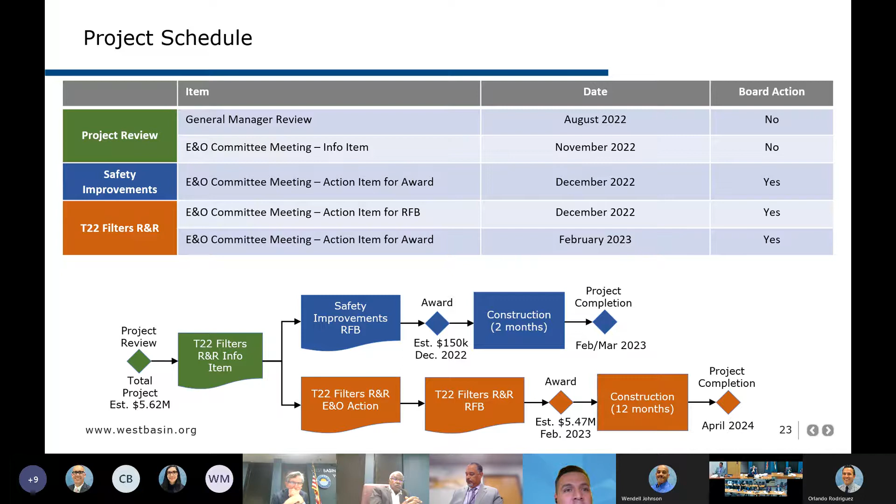For the remaining filters on our project, staff will return next month to the E&O committee to authorize the general manager to request bids for construction. We then anticipate award of the project to take place around February of 2023 with the project completion date of April of 2024. Now, please turn to page 180 of the agenda packet.

And with that, that concludes my presentation, and I'll be happy to answer any questions from the committee. Thank you for that presentation, Orlando. And just as a quick point of clarification on slide 180, the previously planned project expenditures, would that be also interpreted as what was approved in the budget for FY 22-23? Yes. Okay. And so we're basically saying that we would push out that cash flow because of where we are in the schedule at this point. Yes, correct. Okay.

Thank you for that. And then the second item I would bring up is that Orlando described safety improvements that are necessary because of cracks in the wall and the non-bearing walls. And so we've taken action to remove one of the two filter beds out of service to remove the seismic hazard that would place workers in jeopardy should we have an earthquake event and that wall experience a failure as calculated by the consultant who did the analysis for us. So we see that as a fast track item that we need to get on quickly, which was illustrated in the schedule as an immediate repair for the risks on those two basins. So those are my supplemental comments.

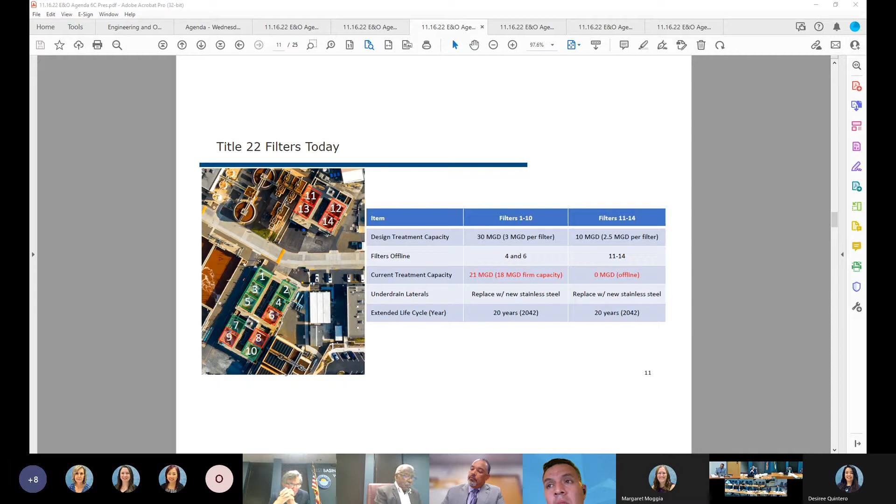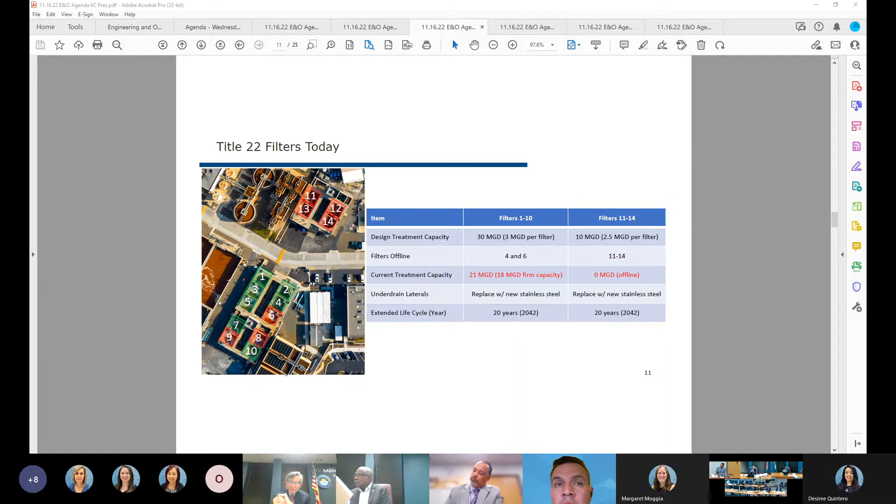And that wall's overstressed for what reason? The wall was built as part of phase 1. It was not built structurally to handle loads from water. When phase two was built, a basin was built right against that wall, so that wall was carrying load from the water itself, acting as a basin. When phase two was built, there were no structural improvements to that wall at the time. So that's the main driver for that.

The structural analysis that we did showed that without a seismic event, the load that the wall is carrying is 36% higher than its available capacity. With a seismic event, it could go up to 83% higher. In the report that you guys provided, most of the walls are below their demand capacity ratio. So the only place where you really are failing is under the seismic load condition, which brings the loading over capacity to 83%. Right. But even without a seismic load condition, it's still higher than its capacity by 36%.

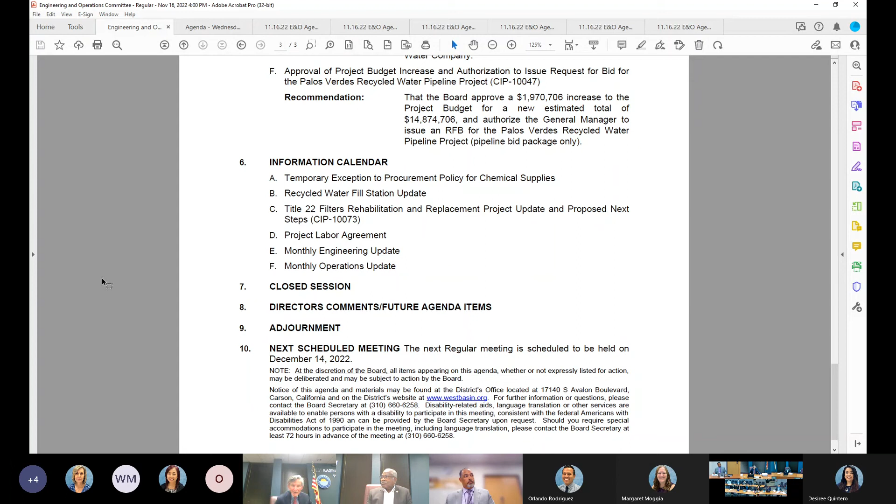Thank you. I think with that, director's comments. Do you have any comments, Director Williams? I don't either. Then the next item up would be adjournment. Before that, next scheduled meeting date, December 14th. It just so happens that there is a Colorado River Water Users Association conference and several board members plan to attend, as well as the general manager and the assistant general manager.

And so it may be. I would suggest we can either cancel the December meeting, if Director Williams feels that's the case, I'm fine with that, or find another date. What's your preference? Cancel? Cancel it, because there's too much stuff in. So our next regular meeting will be in January, and the December meeting is canceled.

I mean, we have action items to bring that are time critical for December. Oh, we have chemical. We'll be coming to you for some. But didn't the general manager just make a presentation that he had the authority to do that? Yeah. So I'm good with that.